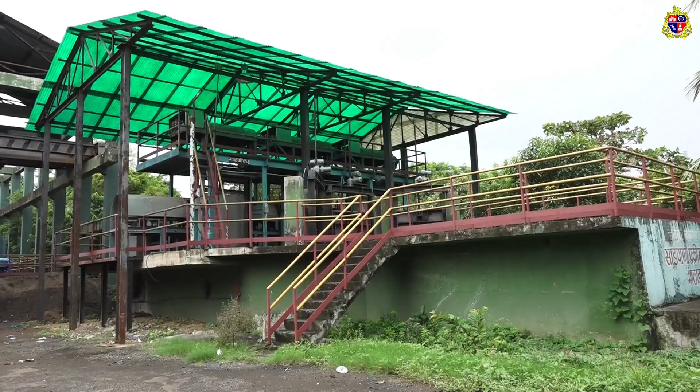Municipal Corporation of Greater Mumbai presents the Mumbai Sewage Disposal Project, Stage 2 Priority Works, Malad Wastewater Treatment Facility. The objective of the project is to provide a healthier and improved environment for the people of Mumbai by improving the quality and reliability of wastewater collection, treatment and disposal, whilst eliminating the impact of wastewater pollution in the environment.

Under the MSDP2 project, 8 wastewater treatment facilities, called WWTF, are taken up as priority works as per Sewerage Master Plan 2002. This plan covered the development of wastewater conveyance, treatment and disposal facilities to meet the projected increase in flows up to the year 2031.

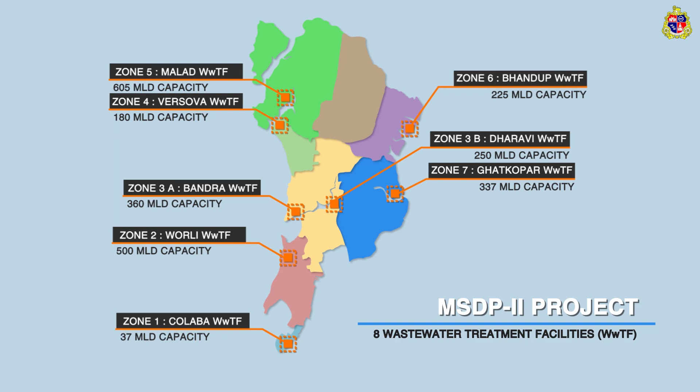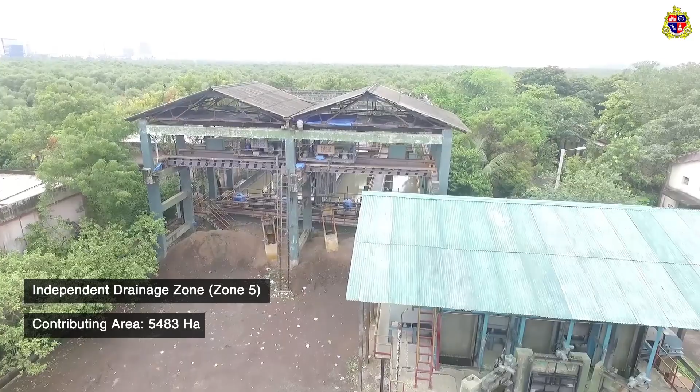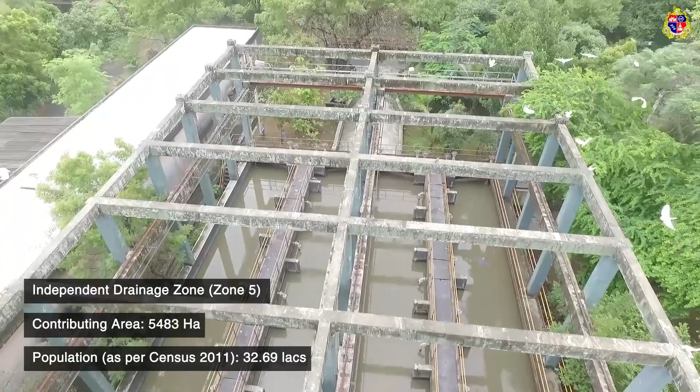As per MSDP2 planning, Malad is an independent drainage zone, Zone 5. Malad zone has a contributing area of 5,483 hectares and a serving population of 32.69 lakhs as per census 2011. It is the largest sewerage zone of Mumbai. The proposed Malad WWTF will be the treatment facility for Malad zone.

The present sewerage collection system comprises several gravity sewer pipelines and pumping stations. From the northern side of Malad zone, the following pumping stations: Vallabh Nagar, Shimpoli, Gorai, Charkop collect the sewage from the respective areas and pump to Malad pumping station located at Marve Road. And it further pumps to the existing treatment facility located at Malvani.

Similarly, from the southern side of Malad zone, Goregaon pumping station collects the sewage from Goregaon and Jogeshwari area and pumps to Malad pumping station and further pumps to the existing treatment facility. Sewage from Malvani areas is also pumped to the treatment facility by Malvani pumping station.

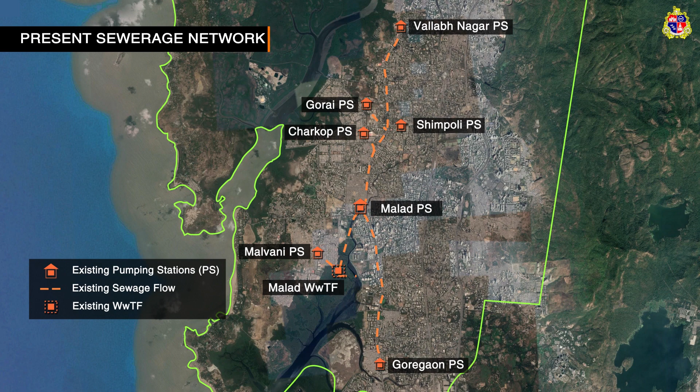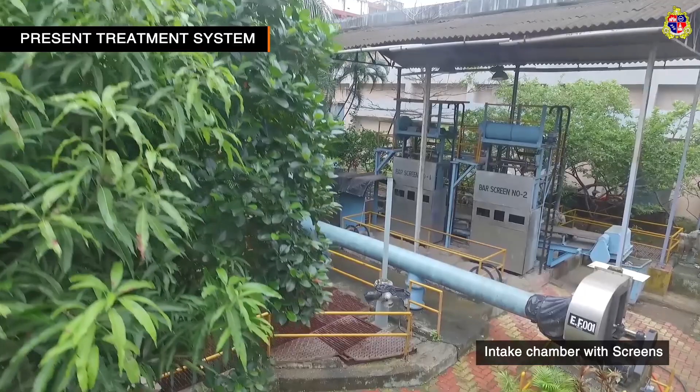All the sewage from different pumping stations of this zone comes into the intake chamber of the present treatment facility of Malad, having 240 MLD capacity, where it is screened for floating debris. Screened sewage then flows to the degritting chamber. After treatment for grit removal, the wastewater is discharged into the creek.

At present, due to increased population, all sewer conveyance systems, pumping stations and the treatment facility are under capacity in Malad zone, causing sewage to overflow or be bypassed at various locations to nalas or the creek. The Central Pollution Control Board has also revised the discharge effluent standards to improve the water quality of water bodies like river, creek and sea.

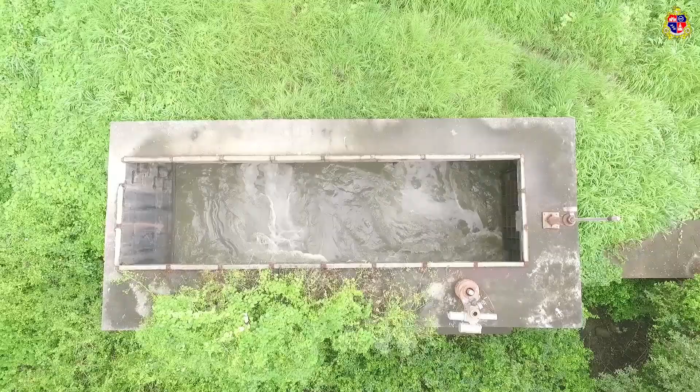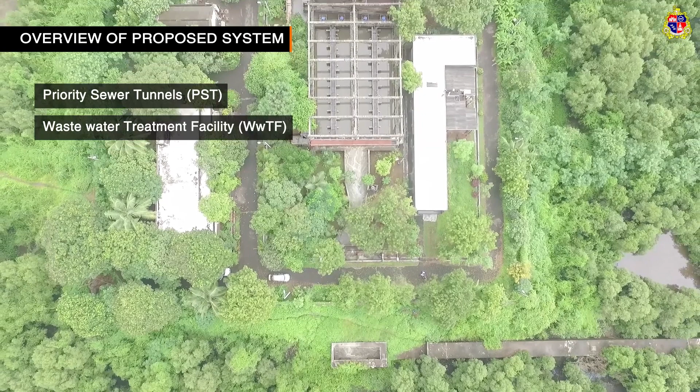To avoid surcharging of sewerage networks and to improve the effluent discharge quality as per the latest discharge effluent standards at Malad zone, the MSDP Department of MCGM proposed upgradation of the sewage conveyance system by proposing priority sewer tunnels and a wastewater treatment facility in Malad zone.

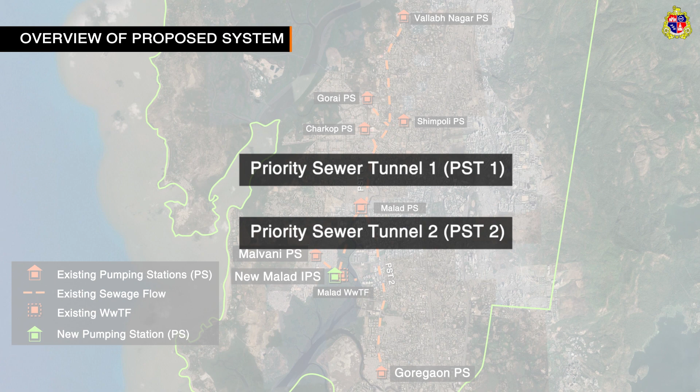The priority sewer tunnel system comprises Priority Sewer Tunnel 1, also called PST1, and Priority Sewer Tunnel 2, or PST2. PST1 is proposed from Don Bosco School Borivali to the Malad proposed IPS, and PST2 is proposed from Goregaon to the Malad proposed PS.

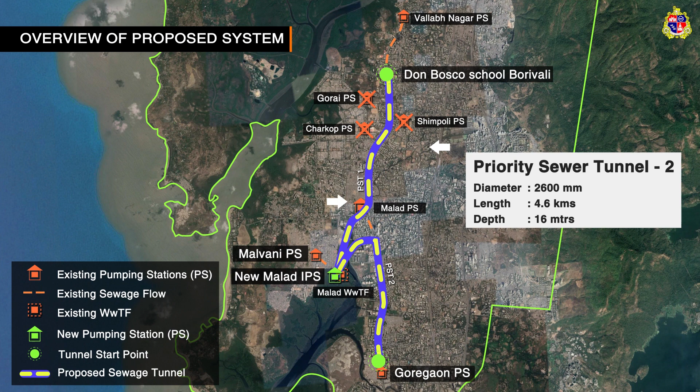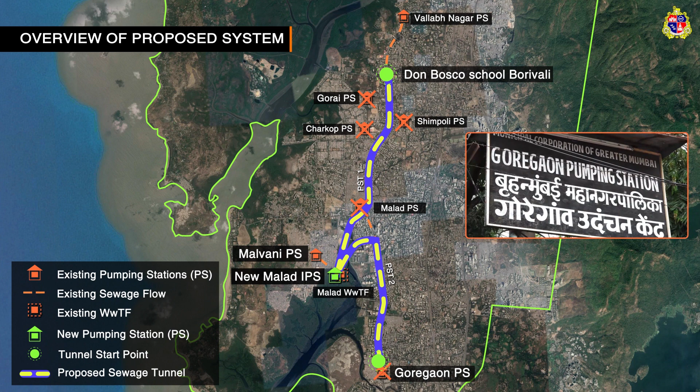PST1, of diameter 3200 mm and length 5.8 km, will convey the sewage by gravity from the northern side of Malad zone to the New Malad pumping station and also eliminate several pumping stations at Gorai, Shimpoli and Charkop. Similarly, PST2, with diameter 2600 mm and length 4.6 km, will convey the sewage by gravity from the southern side of Malad zone to the New Malad pumping station and also eliminate the pumping station at Goregaon.

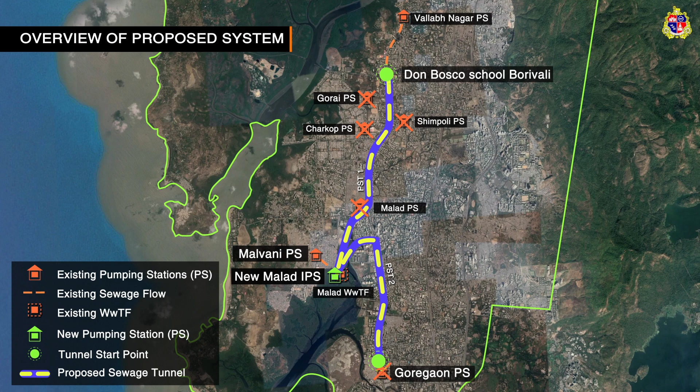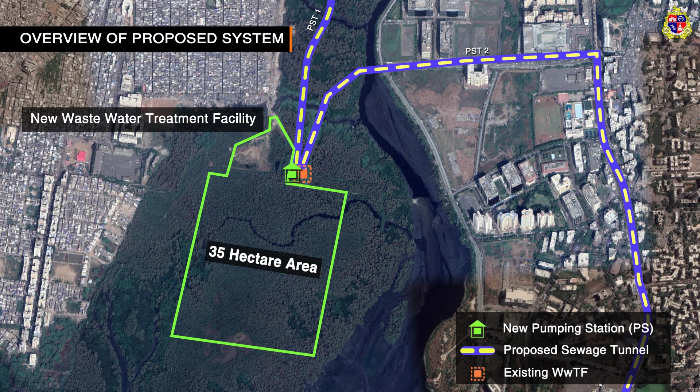In addition to this, several sewerage lines are planned to be laid in Malad zone to improve the collection system of sewage considering the new development. The new Malad pumping station has been planned in the area of the existing WWTF, and the new WWTF has been planned in the 35-hectare area adjacent to the existing plant, which is now affected by mangroves, coming under CRZ1 and reserved forest. This area is already reserved for such a facility as per the Development Plan 1991 and 2034 of Mumbai.

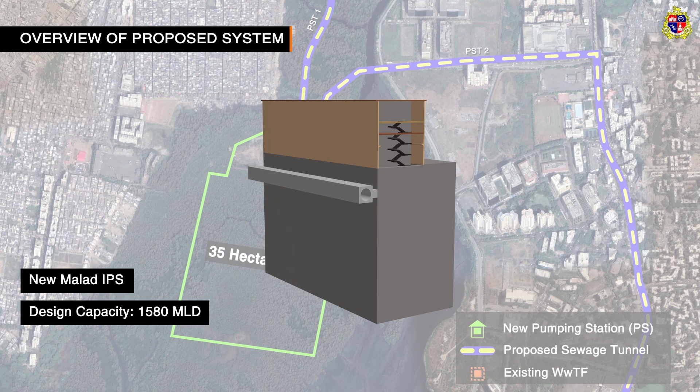The new pumping station will be constructed with a design capacity of 1580 MLD, which will cater to the complete sewage flows from Malad zone. The WWTF project is categorized in two phases. Phase 1. MCGM has obtained the CRZ clearance from the Ministry of Environment, Forest and Climate Change, New Delhi, and the process of forest clearance is in progress.

The mangroves on the area of the new WWTF to be cut will be replanted 5 times the number of mangroves at different locations as per the requirement of CRZ clearance. As per the Forest Conservation Act, the Forest Department has asked MCGM to give compensatory afforestation land equivalent to 35-hectare area elsewhere.

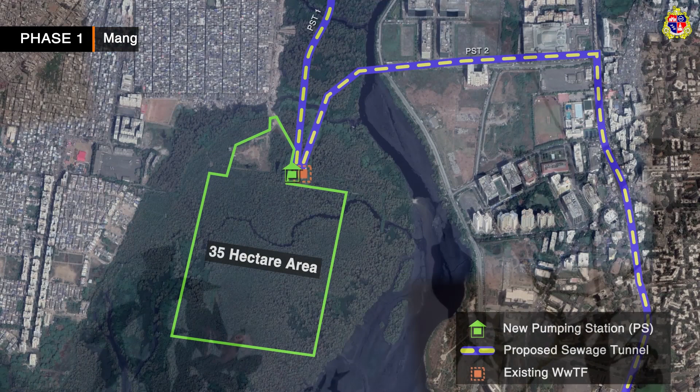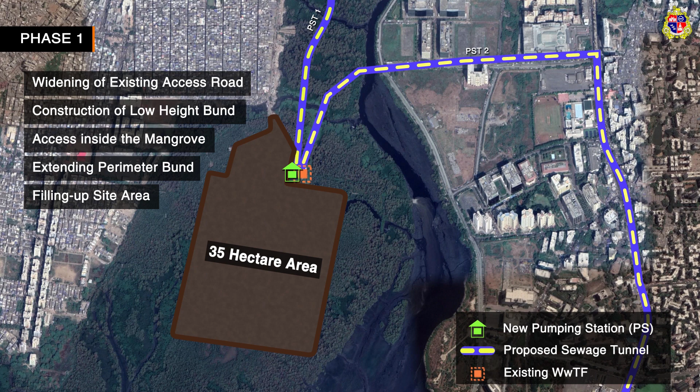The work of Phase 1 also involves the widening of the existing access road, construction of low-height bandh all along the site, access inside the mangrove, extending perimeter bandh along the mangrove area, filling up site area and consolidation. The construction begins after achievement of predetermined consolidation.

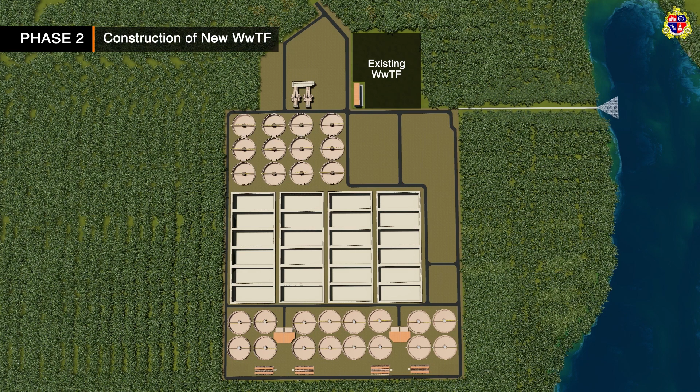The work of Phase 2 involves the construction of new Malad WWTF, which comprises of preliminary treatment, primary treatment, secondary or biological treatment, disinfection system, tertiary treatment system. The sludge management system is likely to comprise of sludge thickening, sludge digestion, power generation, sludge dewatering, sludge drying.

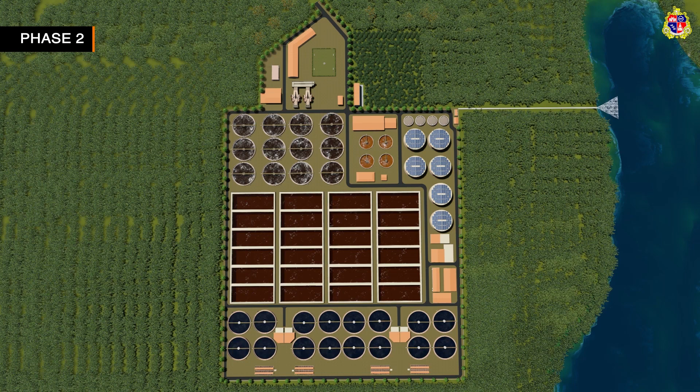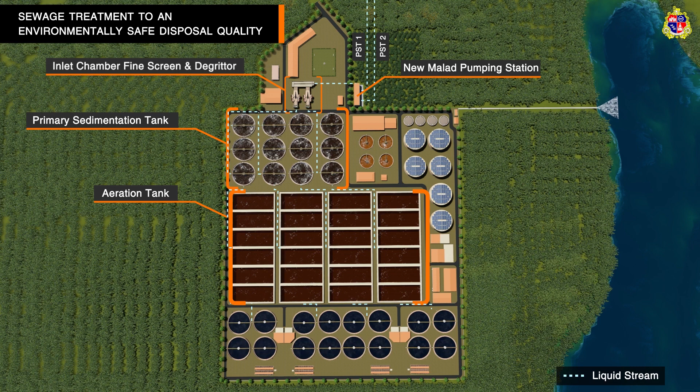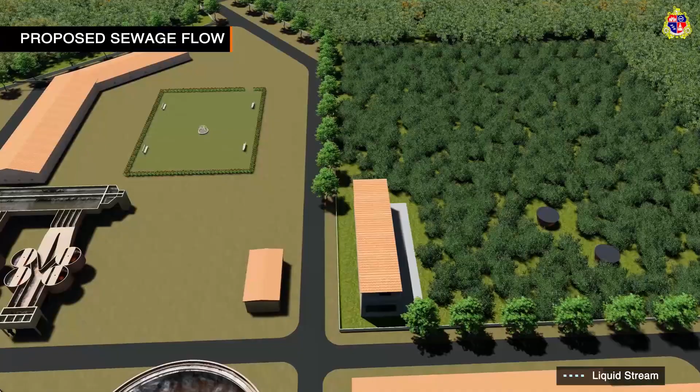Solar energy will also be produced for lighting and miscellaneous purpose. The sewage treatment to an environmentally safe disposal quality and its process flow can be seen here. Let's look at how the project will achieve all this. The sewage from the new Malad pumping station will be pumped to the inlet chamber of the proposed WWTF.

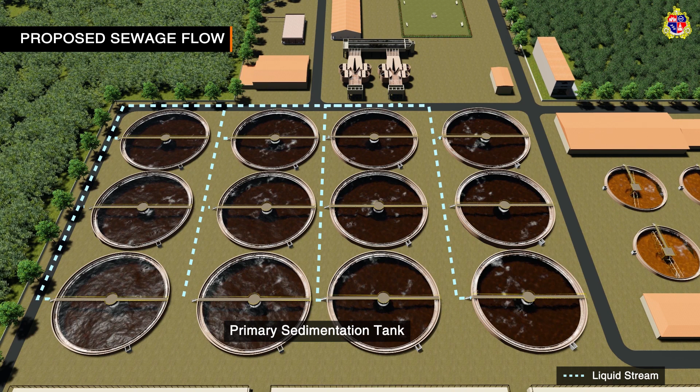The preliminary treated sewage shall be taken into primary treatment to remove a substantial portion of the organic solids from the untreated wastewater, with a resulting decrease in the organic and solid loadings of the biological unit. Primary treated sewage shall be taken into biological or secondary treatment to reduce further BOD, COD, TSS, etc. to meet the discharge effluent standard.

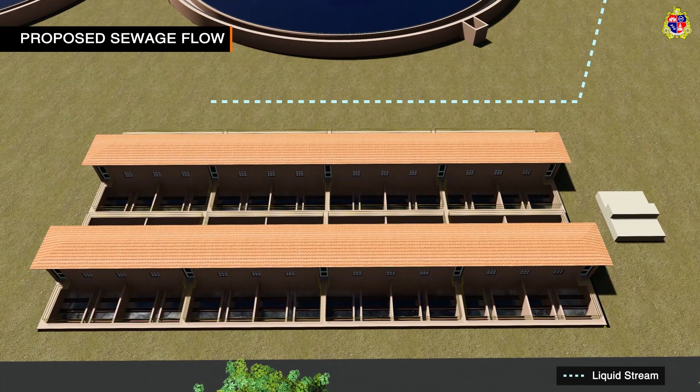There is a provision for reuse of treated sewage by providing additional treatment facility called tertiary treatment facility. It will be planned to the extent of 20% during design build period. However, planning will be made for 100% in phases as per demand of reuse. The treated sewage is disinfected through UV system and shall be discharged into the sea from existing outfall.

Now, let us follow the sludge stream. The sludge from primary clarifier and aerobic basins will be collected in common storage tank. It will be pumped to mechanical thickener for removal of moisture content. The thickened sludge will be pumped to the anaerobic digester for anaerobic digestion. For stabilized sludge, the byproduct generation will be biogas.

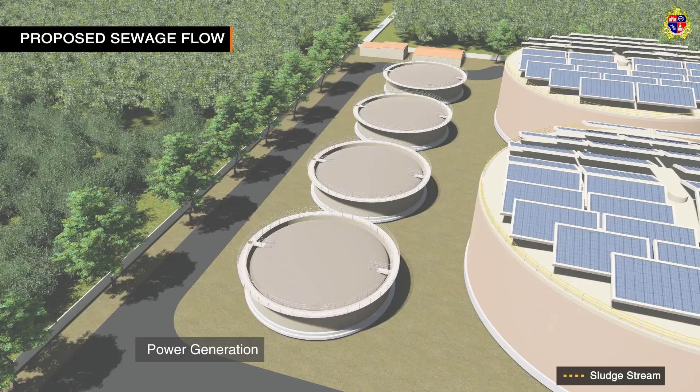The gas will be cleaned for removal of H2S gas in scrubbing system and then will be pumped to a gas engine to generate electrical power for needs of the plant operation. Power generation from biogas will reduce considerably the operations and maintenance cost of the plant.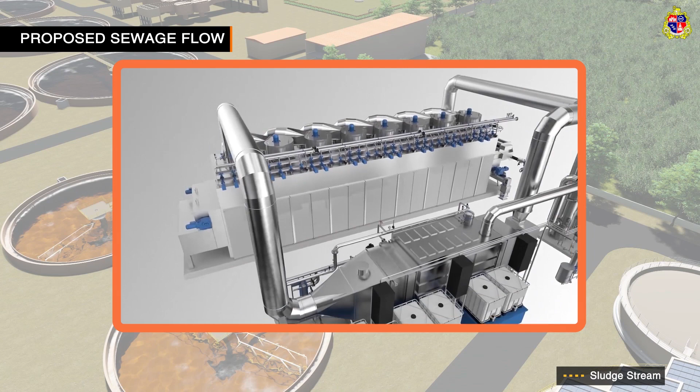After digestion, the sludge will be dewatered in dewatering equipment for further reduction of moisture content and reducing weight and volume for handling. Then it will be passed through thermal sludge drying system for making sludge as Class A biosolids, which will be pathogen free and making it 90% dry solids, like almost powder form, which will increase its calorific value and can be easily transported and reused wherever required, such as agricultural usage, fuel for power plant, fuel for cement plant.

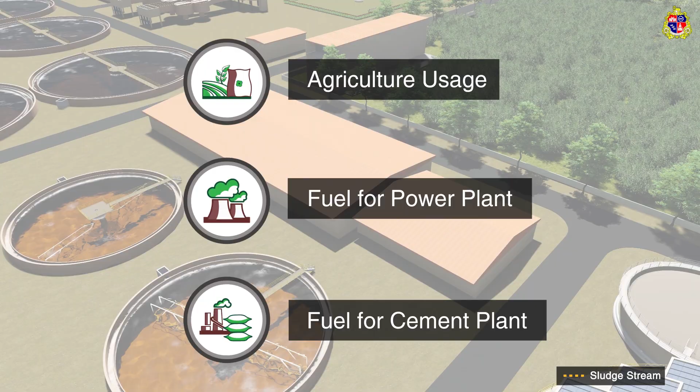Considering the location of the plant in a densely populated area, incineration will not be allowed on site to maintain healthy environment. Incineration off-site will be allowed. The proposed Malad WWTF will be achieving effluent discharge as per standards laid down by Pollution Control Board, and further the tertiary treated water will be reused as per requirement, and environmental friendly sludge quality is also for reuse.

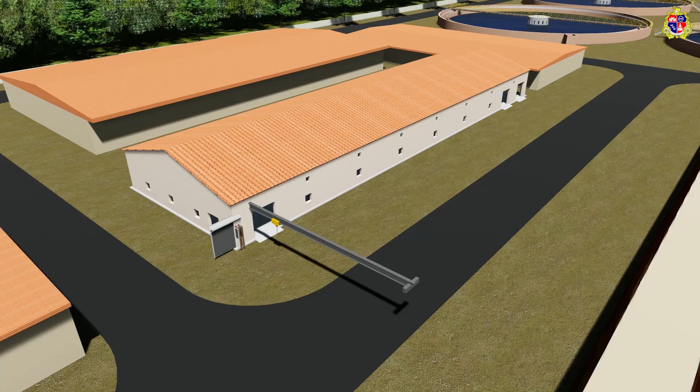The other important part of this WWTF is the odor control system. A strong and robust system of ventilation scrubs the odor generating particles and clean fresh air is given out.

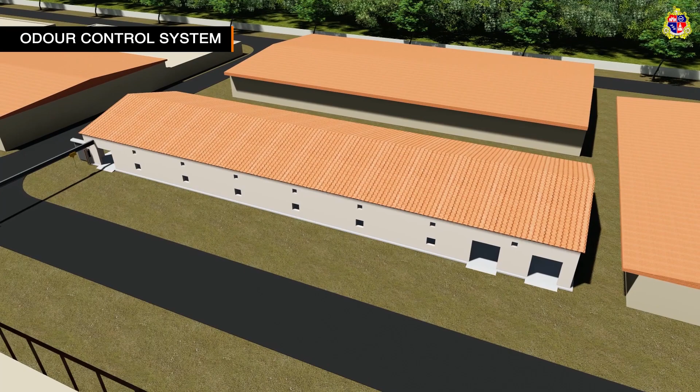The Municipal Corporation of Greater Mumbai envisages the complete reuse of treated wastewater. This treated water can be used by industrial or commercial establishments. It can also be used for gardening, flushing purposes and construction purposes. This will ensure the conservation of fresh water. Every step taken today to conserve water will ensure the sustenance of our future. And with the implementation of MSDP Stage 2 priority works, MCGM has taken that step.